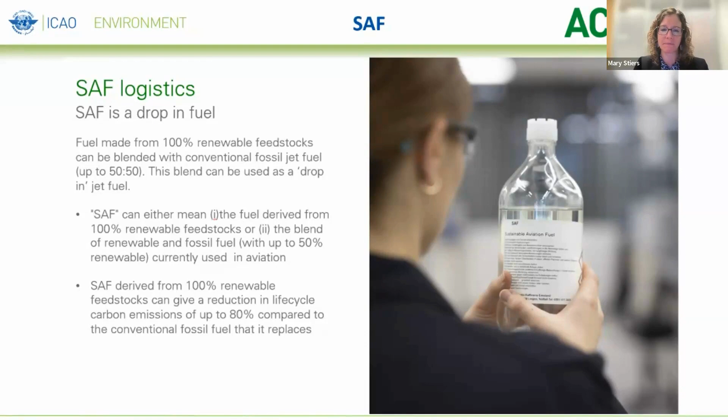You can go ahead to the next slide and we'll talk a little bit more around examples of supply chain custody.

As we discussed, if SAF is considered the drop-in fuel, from a logistics perspective, there are advantages to utilizing mass balance and book and claim. I know you had a session on this previously as it was on the chart. One of the advantages, a good example to explain it, is around 50% of the fuel demand in Europe comes from 10 airports. Therefore, supplying SAF to a small number of large airports is logistically preferred versus supplying small quantities of SAF to all airports all around. So if you just kind of think about scale, that concept makes sense.

Also want to be clear that book and claim is a system where the SAF physical product and its environmental attributes are decoupled. So again, if you're thinking about what system works for where you are, make sure that you're clear on what those differences are. While we're working to grow SAF availability and distribution to as many airports as possible, it's important to be able to deliver SAF through the efficient and low-cost logistics that we have today, and utilizing these methods helps enable that. The EU has recognized this need and will allow for mass balancing in Europe's largest airports for the first few years of the SAF mandate they've approved this year.

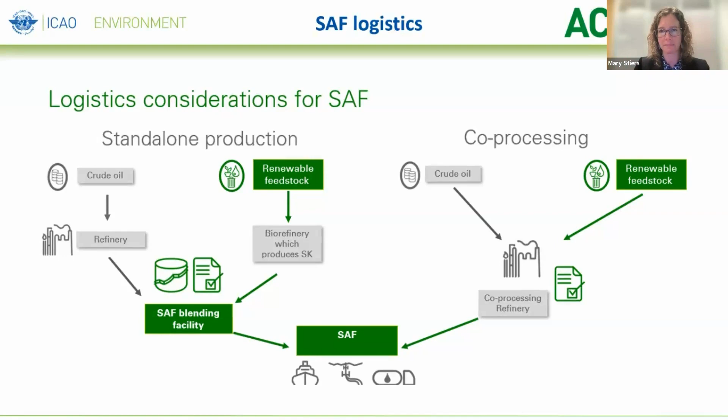Now we've worked our way down to the feedstock point of the conversation. What we want to highlight is that most of the SAF supplied today is derived using the hydrotreated esters and fatty acids, the HEFA pathway. The primary feedstocks for this conversion pathway include waste fats, oils, and greases.

When it comes to transporting these feedstocks to refineries, this is typically done through existing logistics: rail, truck, barge. So there's the advantage that existing logistics and movement are already in place for the supply chain. One interesting caveat: some of the oils used in HEFA facilities will be supplied from sustainable crops, such as cover crops.

BP has an agreement with a company named Nuseed that grows a plant called Carinata. This plant produces oils with good energy density without causing land use change or impacting the food supply. The seed is collected and processed in a seed crushing facility, after which the oil is moved to a facility that can convert it to SAF, either in a co-processing facility or a standalone HEFA plant.

What's interesting is you can actually access a global movement, so you don't have to have your refineries and processes right near where your feedstock is located.

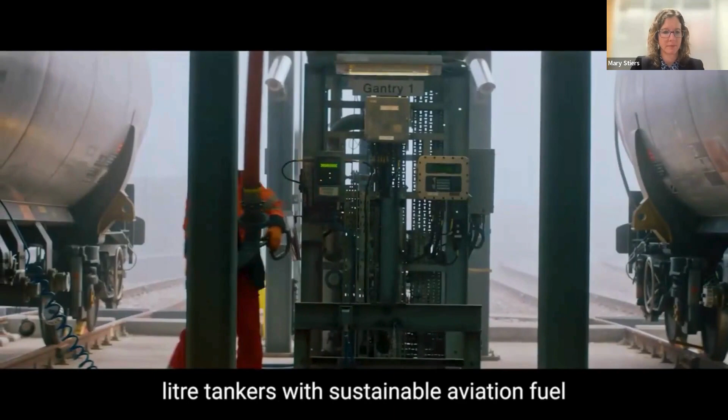We're loading 20 of these 100,000 litre tankers with sustainable aviation fuel, known as SAF, to give customers access to SAF in the UK. This terminal stores aviation fuel and supplies its customers by pipeline, by road and by rail. We import SAF by ship.

SAF was developed to help decarbonise the aviation industry. Every customer has slightly different needs, a different blend of conventional jet fuel and SAF. My name is Ian Blacker, and I'm an operations leader for BP.

The SAF that we primarily use here is made from used cooking oils that would have otherwise been disposed of. We blend it here, retest it, and then send it to airports around the UK. We're really excited about SAF because it has the potential to reduce CO2 emissions on a life cycle basis by up to 80% compared to the conventional jet fuel that it replaces.

We used to blend only jet fuel until recently, but now around 20% of what we hold on site is SAF. The industry is growing really fast. SAF demand is expected to grow exponentially over the coming years. Air BP has repurposed its existing infrastructure, investing around £1 million to transform the facility into one of the leading sustainable aviation fuel terminals in the UK. It gives me a lot of pride to say that I'm playing my part in decarbonisation initiatives like this.

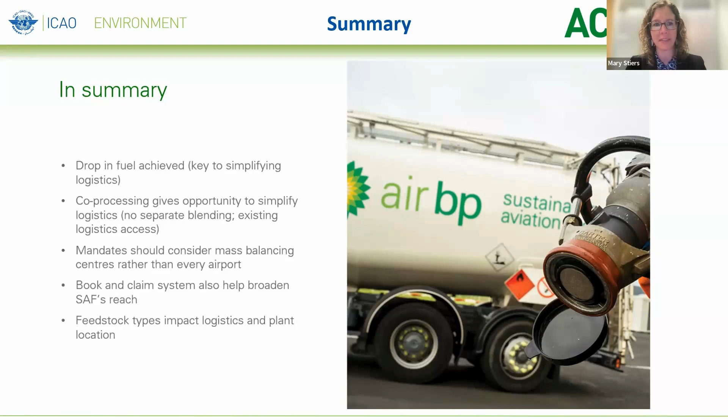Thank you very much, Mary. Very exciting to see all the movement, and congratulations on the 100% flight — that was really exciting to see, and we've had a lot of good feedback on that initiative as well. Yeah, it was quite exciting. Thank you. Thank you very much. So please hold for the questions and answers — I'm sure we'll have some good discussion at the end.

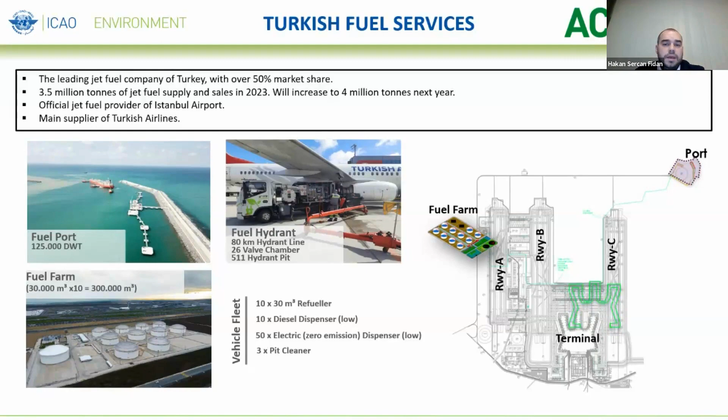After testing and quality control processes, in accordance with aviation fuel standards, the fuel is pumped to pit points via 80-kilometer hydrant lines to be supplied to aircraft. The dispensers, which connect from the pit point to the aircraft wing, refuel the aircraft without carrying any load themselves. Next slide, please.

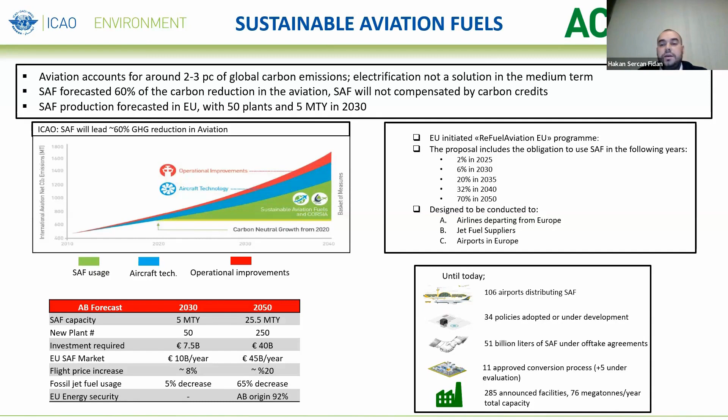With mandates going forth in the EU and the US, and programs such as CORSIA under ICAO promoting the use of SAF for decarbonization targets, SAF production, offtake agreements, and the supply chain are growing day by day. Next slide, please.

Actually, after briefly talking about the situation in Turkey and some of the work we have done as TFS, I would like to move on to the main subject: SAF logistics and the after-supply process.

SAF will be mandatory with the legislation we are expecting from our Civil Aviation Authority to publish in the near future. In this direction, some potential investors have started to work with SAF production facilities. As I mentioned earlier, the demand for SAF by airlines is increasing day by day, and leading airports such as IGA want to offer SAF to their customers.

As for TFS, we have conducted a pre-feasibility study for establishment of a SAF production facility in Turkey. In this study we have been in discussions with proven technology providers, some feedstock suppliers, and also negotiation with government agencies on the regulatory structure that needs to be established. We are trying to follow the developing SAF market in the world.

In the meantime, we made the first refueling of sustainable aviation fuel in Turkey, and we are continuing to do so. I will talk about this in detail in a while. We are also trying to closely follow new technologies and the regulations related to SAF production.

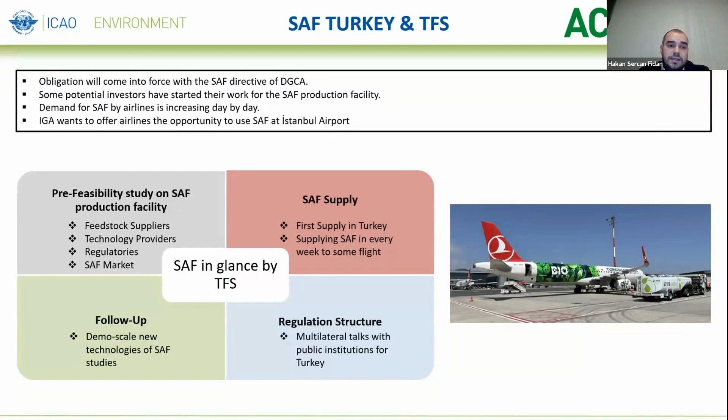The start of our SAF journey dates back to February 2, 2022. Prior to this date, one of our goals while conducting work on SAF was to realize the first refueling in Turkey. Turkish Airlines also wanted to use SAF on flights, and for this reason we started our negotiations on this issue.

Subsequently, we contacted fuel producers that could supply SAF. After one of the suppliers informed us they could deliver the fuel at the time and in the quantity we requested, we started the contract and logistics process. After approximately one month, we received the fuel at our facility physically, and we made our planning as IGA, TFS, and Turkish Airlines for the flight planned on February 2.

The flight was to take place from Istanbul to Charles de Gaulle, Paris. We added a certain amount of SAF-containing jet fuel to the conventional jet fuel to the required volume, and performed a final quality control process before supplying the aircraft. With the difference of our refueling operation, we started refueling with tankers, and I can say that we took our place in one of the historic days of Turkish aviation.

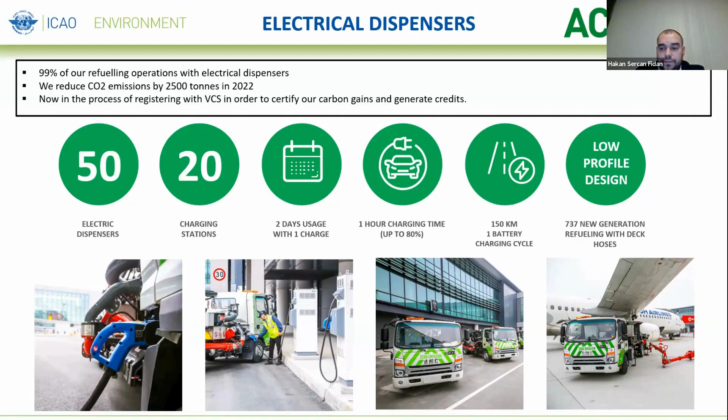Thank you very much, Hakan, for that experience. This is exactly what we were looking for in this session, the practical experiences, and it's nice to see how it complemented the Air BP's presentation, because they have the blending facility away from the airport, and you're doing the blending right under the aircraft wing—different ways of doing it. So this is all very interesting. We can discuss further in the Q&A session. Thank you very much for that.

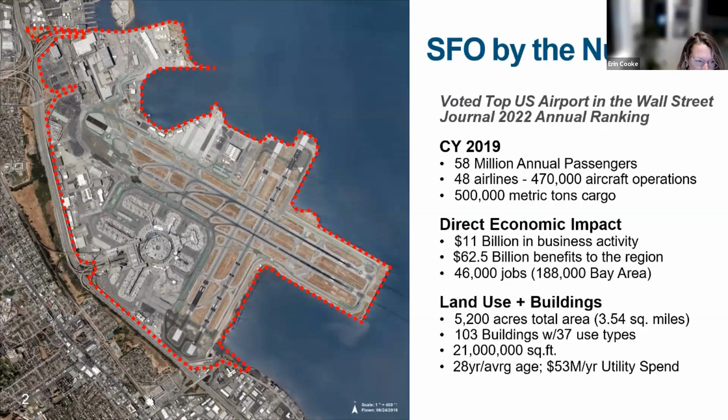We are the largest employer in our county, and we want to be able to sustain that. The way we are able to do that is really by meeting our climate obligations and mitigation. Next slide. Just to give you a sense of our climate obligations and impacts as an organization, SFO has adopted a quad net zero goal now as part of our new strategic plan. We are focusing on achieving net zero carbon, energy, water, and waste by 2030.

Our pathway to do it is represented here on the left side of my slide. We already are at about a 41% emission reduction through implementing scope 2 adjustments to have a net zero carbon energy source from a hydropower facility located and owned by our city and county of San Francisco, which our airport is owned and operated by. In addition, there are mitigations in our building sector and our on-ground transportation sector. The final balance for that is going to be activating an electric central plant.

However, when we look at our sphere of influence and scope of emissions, SFO's total emissions are really less than 1% of the total emissions that arise from the operations of our airport. So as an organization wholly invested in climate impacts, our airport's mission was recently updated to be an airport delivering an experience where people and planet come first. We recognize that just focusing on scope 1 and 2 emissions was not sufficient. When we look at those total emissions, about 96% come from our aircraft activity.

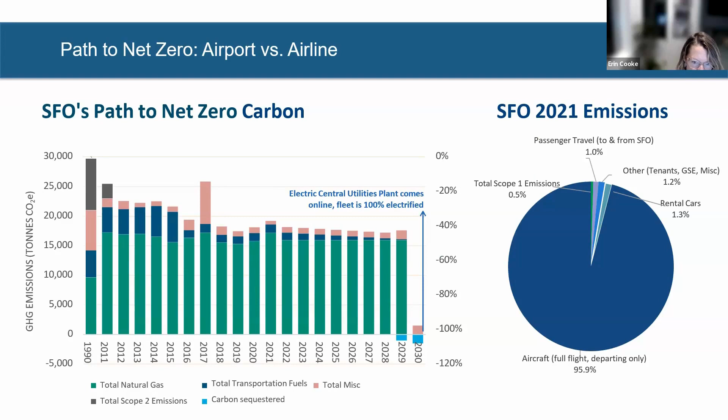Next slide. The things we'll cover today, where we feel airports have the ability to provide input, is basically a 4-sphere of influence for us. We have the opportunity to engage and consider the feedstocks, the production, transportation and logistics, and infrastructure.

There are lots of questions that we'll be considering, and I've articulated those here. There are probably dozens more, but my goal today is just to cover how we're considering this at the airport, or as an organization, to really broaden our reach and share our experience at SFO.

Very few other airports within North America, but those that have come to the table, we've reached consensus around what the opportunities are in logistics and infrastructure. I'll play those out as part of a resource we've recently put together, starting broadly with that resource and then ratcheting it down to what we're covering within California at SFO.

Our next slide just quickly snapshots what that resource is. Through this organization, I can put this link in the chat—it's linked in my presentation, which will be shared after. We've looked at the supply chain, which I think is a good example of how subnational organizations can come together and provide resources that give insight and intelligence to organizations considering big, broad questions like SAF infrastructure and supply chain. Here's what we found as we went through that study.

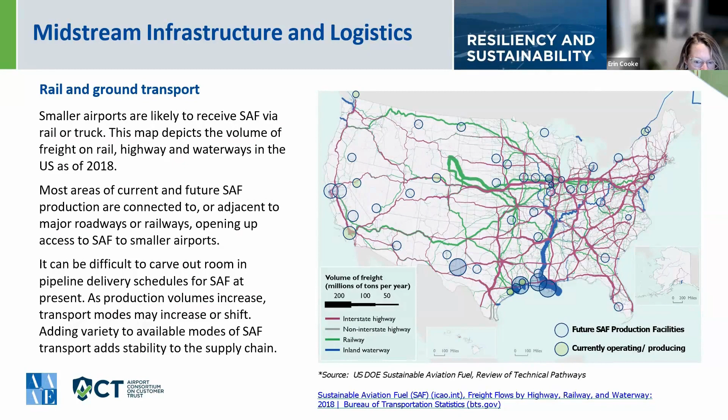Rail and ground transport are obviously easier to amend, augment, and supplement, and are likely going to be the focus of state grant opportunities and/or the logistics companies working to serve SAF production facilities, enabling uplift of fuels from airports our airlines have dedicated the fuel be delivered to. So as a subnational government or airport, understanding your other logistics alternatives if pipeline is not an option is really important. Let's move to the next slide.

So now, knowing that the fuel is coming to you, we as an airport organization like to understand what is the best practice for on-airport and off-airport. On-airport is very dependent upon whether your facility or campus has the space available to accommodate additional transportation and fuel infrastructure. At SFO, we are already incredibly land constrained with tremendously high real estate values that we want to maximize development of to provide our business purpose, continuity, and economic development benefits to our region. So for that reason, we are not dedicating on-site infrastructure development for SAF.

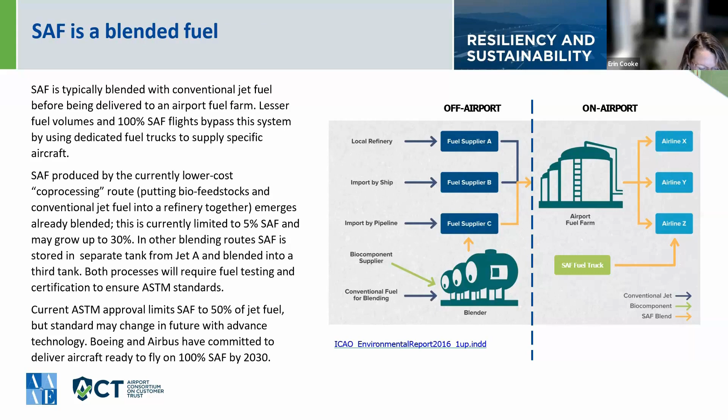Just some other considerations around transportation and delivery: airports need to be aware that these fuels should be received at your airport right now because of the ASTM standards - that would be our national requirement. The fuels are only allowed to be blended up to 50%, which makes them essentially undistinguishable from fossil jet A, except that it has certainly better properties, as we all know in the industry. But those fuels don't need to be segregated, don't need to be stored in a separate blending tank, and don't need to be distributed via a separate fuel system. That's a huge benefit of sustainable aviation fuel at the current blend rate.

I will note that it is certainly of value for an airport, particularly one with a fuel consortium or buyers alliance, to get in and have a conversation with that group much earlier than SAF is actually delivered, especially for emerging economies where SAF is new. We found for our own airport in 2018, working with our fuel consortium prior to our first delivery to get all of our airlines in support, and to get our airfield operations team and fire and life safety teams understanding the fuel and acting as advocates before it was delivered, was incredibly helpful - there were no barriers to entry when the fuel was actually received. I realize we're now five years later, and there should be much more sophistication and awareness and support in the industry. However, I'd still definitely recommend it if folks are less aware of SAF in your countries or at your airports.

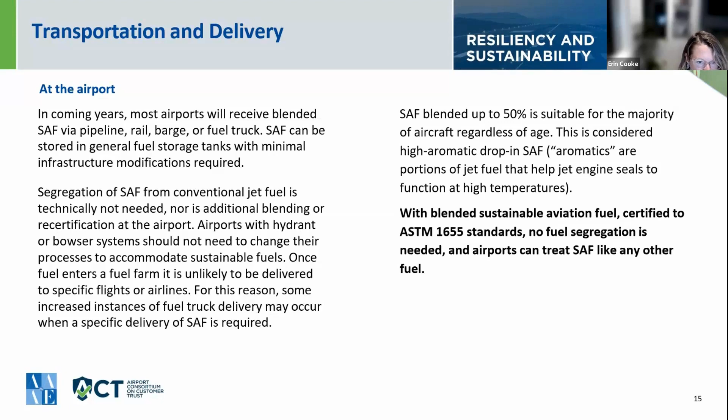This slide represents how, often as airports are just getting started or during special events, airline partners like to do into-plane services where fuel is delivered directly into the wing. This isn't the optimal delivery solution due to challenges managing flight activity on airfields. However, these fuel trucks can handle demand and allow higher blend volumes than what we receive at SFO, about a 30% blend. It goes directly into an aircraft, providing carbon reduction and air quality benefits on the airfield. We may see more of these as pilot initiatives pop up at airports worldwide, and it's a great way to visualize and build support for SAF across airport partners.

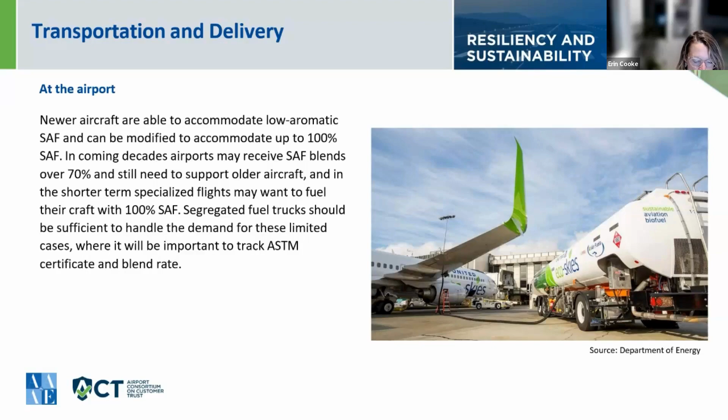Those slides were meant to highlight how to consider upstream feedstock development, as well as production, transportation, and logistics infrastructure needed to enable receiving the fuel at the airport, plus some on-airport considerations.

Now we'll look at how SFO has actually applied that.

For background, a quick snapshot of how SFO has engaged in sustainable aviation fuel: we've been working on a SAF program since 2017, when we held our first workshop intentionally with airport partners, airlines, SAF producers, alternative fuel suppliers, conventional suppliers already delivering Jet A to SFO, pipeline operators, and some NGO partners, to explore what we needed to elevate sustainable aviation fuel use at our airport and across the state of California.

That group recognized that price supports were still needed, so we lobbied the California Air Resources Board to allow the low carbon fuel standard to include sustainable aviation fuel, giving it about a $1.25 incentive over any other state in the nation to date, though many states are coming online now. That successful initiative pushed California to include it in January 2018.

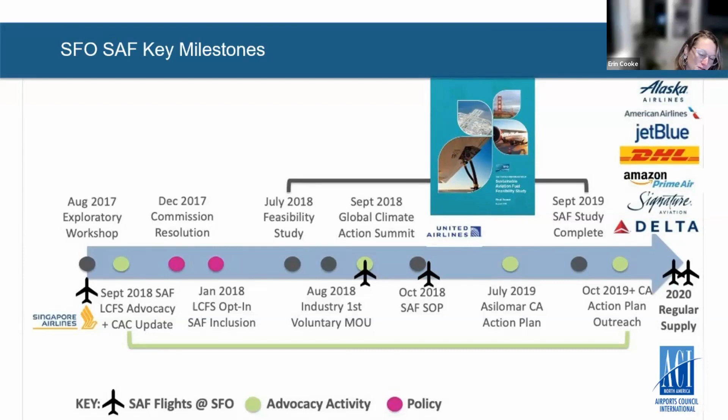We're hoping to hit that threshold of 10 million gallons, with our sustainable aviation fuel working group's goal being 5% SAF by 2025 - that's about 60 million gallons for us. So we have a ways to go in 2 years, but with our partners and logistics being well answered, we hope to seed that solution and meet that North Star we've set.

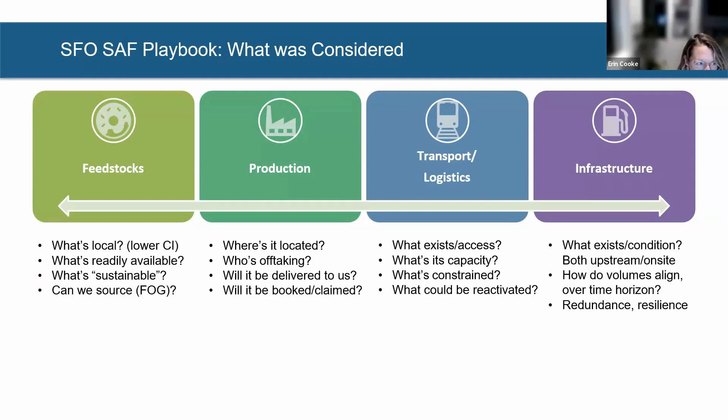And then just understanding what the value of your organization is and how to really build sustainable aviation fuel as a part of your strategic planning or climate action planning, the benefits there, and why you would consider making an infrastructure investment: it can provide the greenhouse gas emissions mitigation, also tremendous air quality benefits for the folks that work in your airfield, but also provides fuel redundancy and resilience in a global economy where fossil fuels are being increasingly constrained due to geopolitical issues. So all of those things for us were part of our huge consideration.

Next slide. And I promise I will wrap up shortly.

So just to keep in mind here for SFO, we wanted to really try to match, as any organization or subnational government would, what the demand curves or growth curves for sustainable aviation fuel would look like at our facility. Again, that's really important to understand what those fuel supply forecasts are, who's expected to bring or deliver the fuel for your organization and how you can accommodate that.

So what we did was really look at what the production facilities were, where those airline commitments were, and how that growth curve would potentially impact the airport, both in terms of what the current blend wall is through our certification program, but in the future - and something we're actually revisiting this analysis with - is once that blend wall goes away, what does that mean for us in terms of infrastructure? Very few organizations are considering that 100% SAF, but as we just saw from Air BP, it's something we might need to consider more quickly.

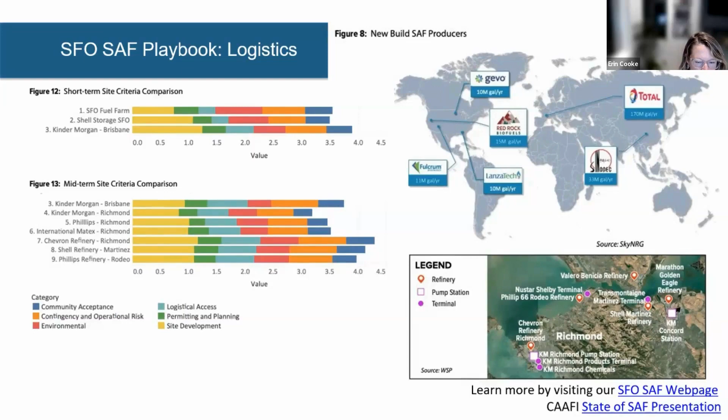This last slide represents that the demand forecast was done at a highly detailed level, where we looked at each of these facilities and sites. We identified what the current infrastructure was and what the required infrastructure would be to serve all of the time horizons represented, and even did site plans and schematics for the most viable locations. This was then provided to those operators to make them aware that modest infrastructure investment, including projected dollar values, would be supported by the folks that produced the study in order to enable SAF production, development, and service to SFO.

From here, we have seen that a variety of locations in our East Bay, connected to our airport's pipeline, have made announcements that they are either transitioning away from fossil products to alternative fuel, both renewable diesel and sustainable aviation fuel, or expanding their footprint to include SAF development and service to accommodate the Bay Area airports. Our pipeline does serve the three Bay Area airports, which we are currently partnering on and teaming up, and the benefit to them is that we were able to produce the study, giving them access and insight into what those development playbooks will look like for the region, not just for SFO.

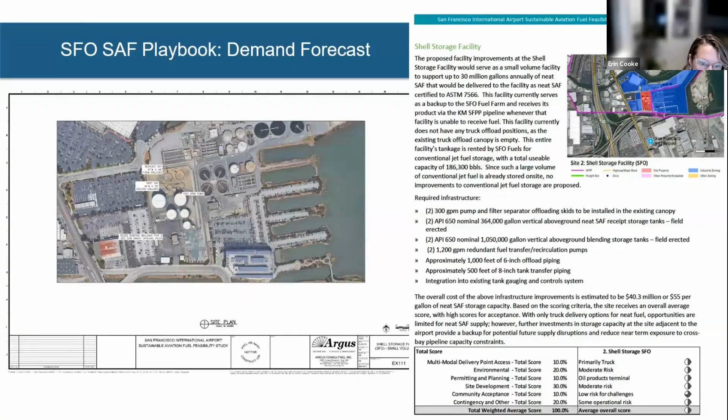Thank you very much, Erin. This is a great level of detail, this is what we're looking for on this SAF series, to go deep in the topics. This is all very good material that I'm sure will be very useful. Thanks for your time, and not only for your time, but also for waking up so early. I know it's pretty early there in San Francisco. That's really much appreciated, thank you very much.

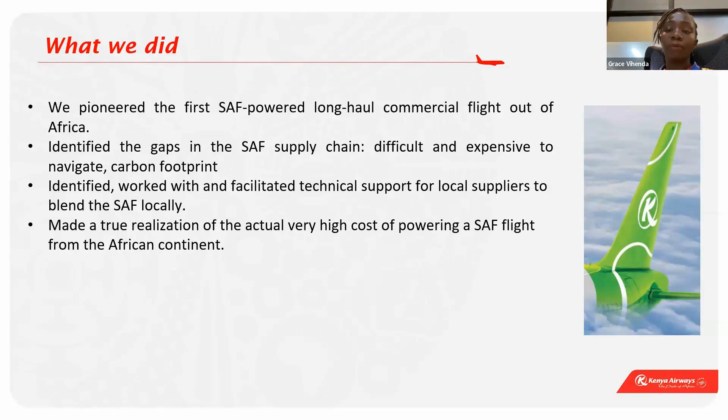And then also we identified and worked with local suppliers who helped us blend the SAF locally. But as I was explaining, it's a capability we helped them to build - they didn't even know what SAF was. So it was quite an interesting journey in terms of educating people in the supply chain, talking to different stakeholders, helping them understand, and all of us working together to actually make it work.

The next one is we had some very good collaborations with various stakeholders in our government and the African Union Civil Aviation Authority, our Civil Aviation Authority. It was quite a good experience in that we got to bring stakeholders together because we had a sense of urgency at that time - we had this test flight that had to be done on a specific date. That sense of urgency was very good because we got to collaborate with different stakeholders to make it happen, and all that helped catalyze an environment.

Where now we've set up a technical working group that is looking at the regulatory framework. This is now from authority, from our government, from different players in the industry. So overall, it's been quite a good learning experience.

Ideally, when we have the infrastructure set up properly, this fuel is supposed to be available at the airport for us to buy based on whatever our need is. But in our case, we've had to create that whole logistics aspect for it, which is not something we're complaining about - it's just learnings we've made, supporting our government and stakeholders to be better prepared for SAF.

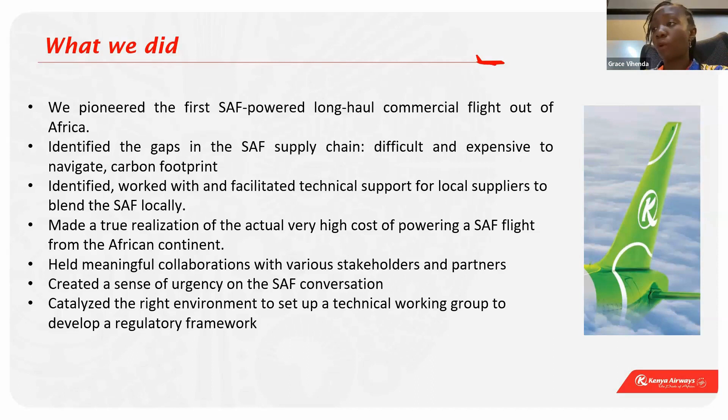And then on the next slide, there's a number of recommendations we took for different stakeholders. For example, a harmonized approach in terms of, as a region, how is it that we want to handle SAF? And here there's a good conversation that needs to happen on having a production facility here on the continent.

Like I told you before, we have plentiful SAF biofeedstocks here in the country, including the biofeedstocks from the company that we bought the fuel from. They actually use and export biofeedstocks from our country.

So we're really pushing for production of SAF here in the country, looking for partnerships that would support that kind of agenda, because we believe that for SAF to be truly sustainable, it includes reducing the carbon footprint of having to export it and then import it back to use it. So those are the conversations we're driving here in the country.

And that goes on to the second point on SAF production facilities in Africa that will definitely help to mitigate the cost. Because if the feedstocks are from here and they're plentiful here, then it means if we have production here, the cost of the SAF will be much lower.